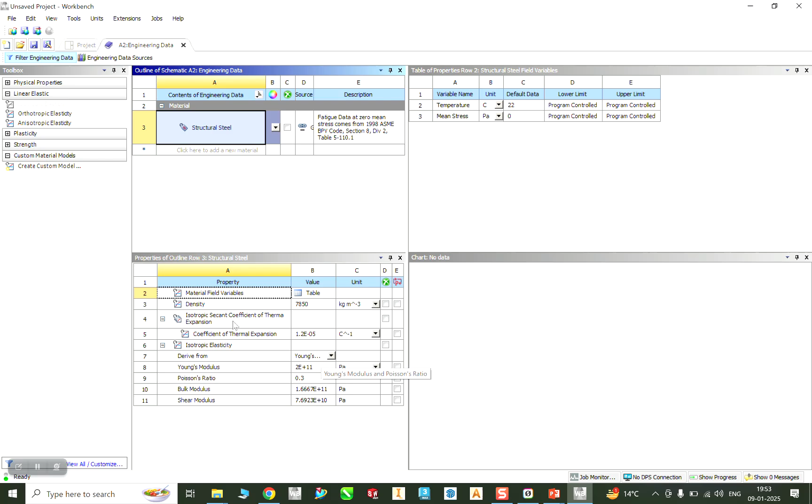We need that structural steel, and if you want to edit these isotropic properties, yes, we can change that. But right now whatever properties are already given are okay for my product. Okay, so I'll move to that modeling part again.

Now what do we need to create? We need to create a geometry. So here basically we can see there are two options - it's basically two modeling spaces. You can do modeling there. Okay, so I'm going to work on that new Design Modeler for that geometry.

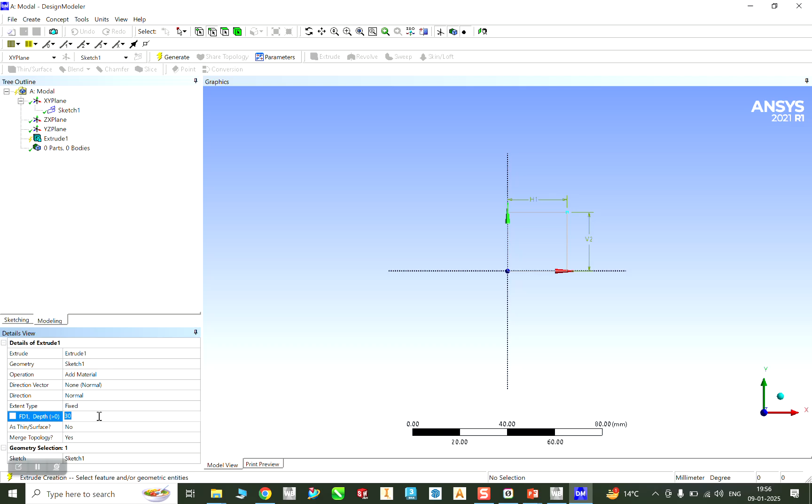Now you can see here, when we have clicked on this, one sketch has been selected - that rectangle has been selected. Now what do we need to give? We need to give the depth, that is 250mm. Okay, the beam length is 250mm.

So need to click here, and after that you need to generate. Now right click and you can see the isometric view. So this is my beam.

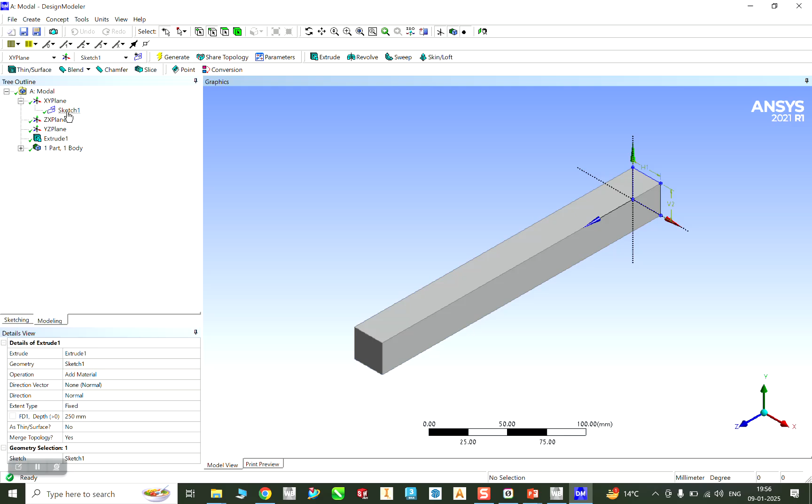So we need to close this modeler window - you can close it, or you can minimize it to move to that other module. Okay, so this is your mesh part where you are going to see the modal analysis. Okay, so just double click on this model analysis.

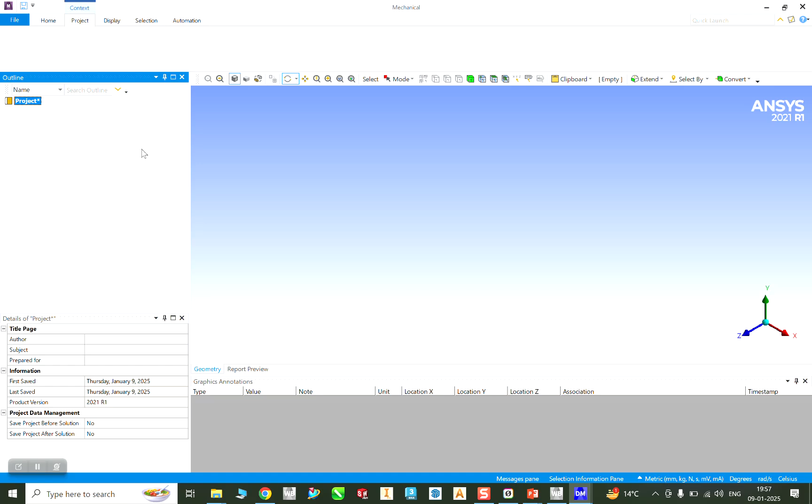A separate mechanical window is going to open for that. In it, you will basically get vibration analysis and modal analysis related tools, so that we can analyze the vibration over there and get the natural frequencies.

So here you will find the modal window is going to open. So the modal analysis window is going to be open, and we are going to create a mesh over here.

Right click, generate a general mesh first. So this is quite a large mesh, the element size is quite bigger. So what we are going to do is click on mesh again, and below you can see there is an element size option. Element size is basically the line between the vertices, that is the length. So you can give 4mm over here.

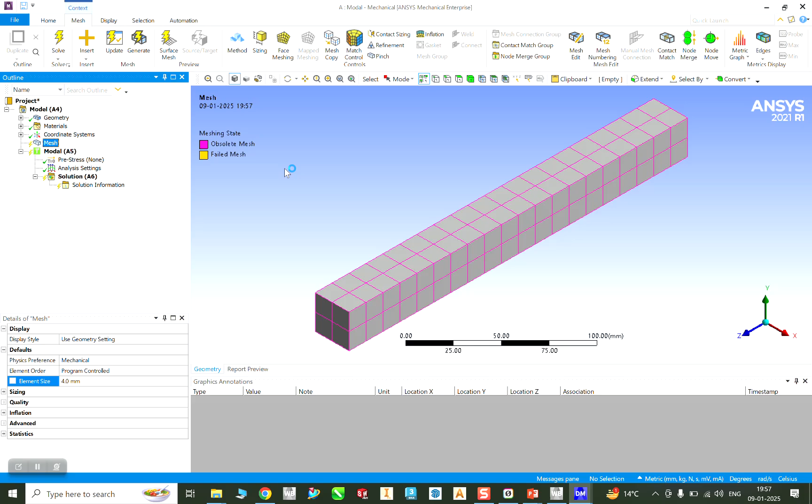You need to check that the unit is in mm. So again you are going to right click on mesh and generate mesh. So you can see now it is a fine mesh.

Now you can even check the number of nodes and elements if you click on statistics. You can see 15,000 nodes are there and 3,000 elements are there. You can even increase these numbers by reducing the element size. As you decrease or increase the element size, the computational time is going to increase or decrease. So we have done that mesh.

Now we need to click on modal analysis. After clicking on modal analysis, what do we need to do? First thing is, obviously, we need to give a support. There is a fixed support option, so I'll take that fixed support, and from here we are going to click on that face. Just click on this face and apply the support. The support has been applied.

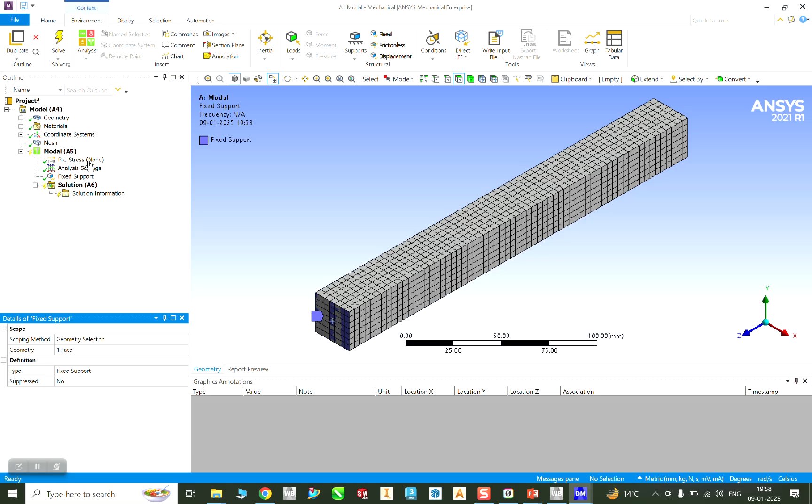Now what we need to find out is the pre-stressed setting. You need to click on analysis settings to set how many mode shapes you want. These are that number, it's given as 6, but I want more. You can click here and increase it, or write like I want 25, so that 25 natural frequencies you are going to find out over there.

After that, what do you need to do? Just go to the solution, right click and solve. Now after that, the solution is going to come and you will see various mode shapes over here. So these are 25 mode shapes, and here you can see the frequency in hertz from 1 to 25, and obviously it's going to be varying.

Now, if I want to see these 25 mode shapes, I need to click on this surface, right click, select all, right click again, and create a mode shape results. Just click here, and now you will see 25 different mode shapes are going to come.

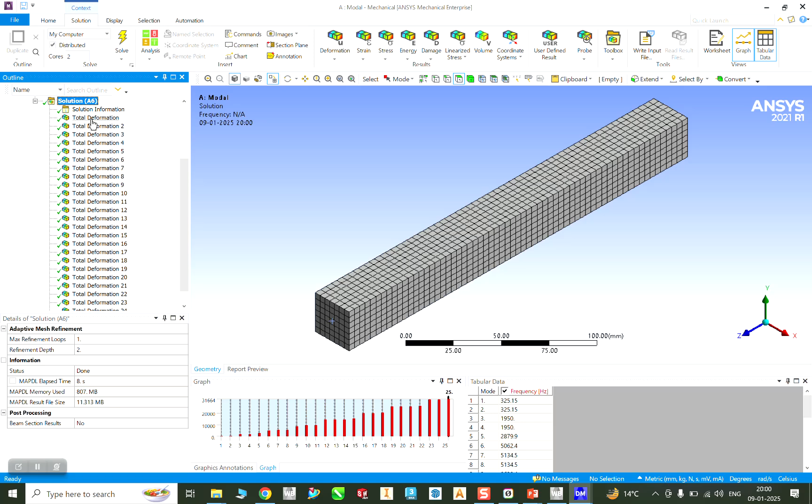Now what we need to do is right click over here and evaluate the results. Now we can see the different mode shapes. At mode shape 1, we just click and you can see it's going to show bending. So when you play it, you'll be able to see the bending.

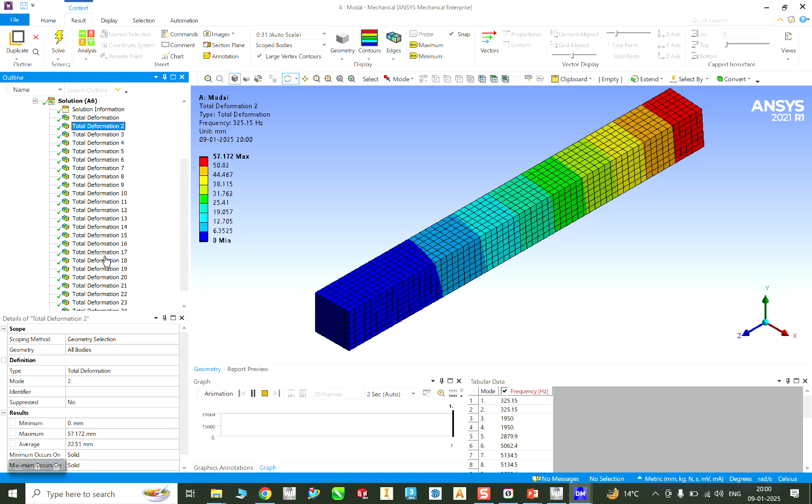Now if you go to deformation 2, you'll check that it's going to be compressive, going inside. So different mode shapes give you different shapes, and if I click here, I'm going to check, it's going to twist. So these are various mode shapes at different natural frequencies that we are going to get.